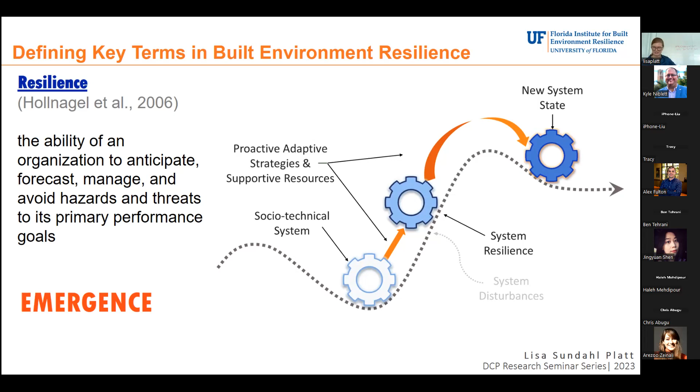So when we look at constructing computational models, in addition to the design basis, which are those characteristics that we're either designing or building for, we look at outside design basis and human basis factors. Outside design basis would be those influential factors that are not within the scope of the building owner's requirements or the building standards, and they're often caused by unforeseen or emergent events.

In Florida, we have seen certainly changes to building code requirements due to increasing hazardous weather events. That's something that my license is coming due for renewal, and I have to take a bunch of CEUs on increased wind resistant codes. So those are outside design basis factors, because we know although hurricanes are going to hit, we don't know the extreme results that they're going to cause.

So those are outside design basis. Human basis are basically those results that occur due to individual human behavior. We know it can be very difficult to predict how humans are going to respond in a given setting when all things are normal. Certainly when things are not normal, humans have a tendency to behave in ways that can be very diverse. So part of designing for resilience is understanding the variability of human response in a given environment.

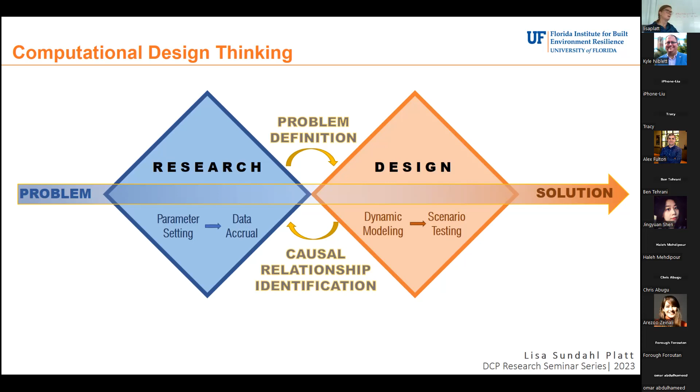Now it's increasingly useful to use computational models to better predict the inferences you have about the outcomes of your design or construction. In terms of design programming, we can take a design programming hierarchy and look at...

...the integration of AI through gathering relevant information - in other words, what's the causal relationship between inside and outside design basis factors, quantifying the requirements, how does the current system architecture influence dynamic performance outcomes, and then summarizing the problem: what do dynamic scenario simulations tell us about predictive design resilience potential?

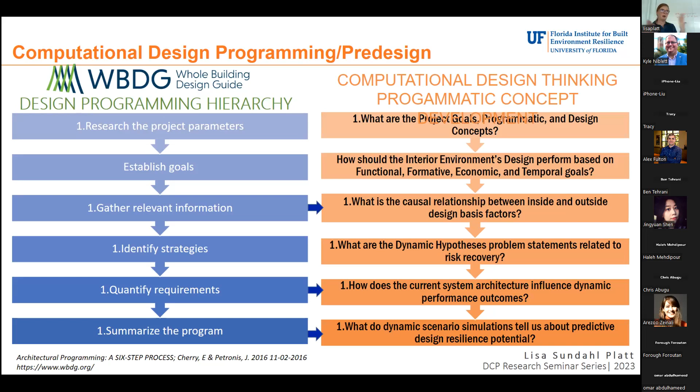So we can see something that we've used for decades now, the whole building design programming hierarchy, marries up well with this notion of applied computational design modeling.

So where do we usually start when it comes to curriculum development? Usually when we're training students - and we have a lot of introductory courses in this college right now - we look at teaching student principles of machine learning. Machine learning is a good on-ramp method for having students be familiar with ways to use applied AI to inform design.

Predictive outcome analysis - the goal being to train a model so that it can predict outputs when given new data, and then understanding the data relationships. Supervised learning offers a way to use machine learning to evaluate relationships between input and output variables.

Achieving this can be a very tall order. There are two main techniques available to designers to test design. One is usability testing, which is very effective for generating feedback loops on design performance. However, it's expensive and time consuming because you have to outreach to users and get their opinion, and that can be misleading if you're talking to the wrong people.

Another approach is modeling, which requires abstracting human performance characteristics to determine systems interaction outcomes, allows for scenario testing to predict what design versions result in the best performance, and is a multifaceted approach to making predictions about users.

One of the quotes I always use when I teach the data science for interior environments class is: all models are wrong, but some are useful. If you look at a map of the world, it's not actually an accurate map because it's a map — it's not the size of the entire planet, or it'd be completely accurate. So in understanding this, we can use modeling as a form of abstraction to better understand the general outcomes of the predicted system users.

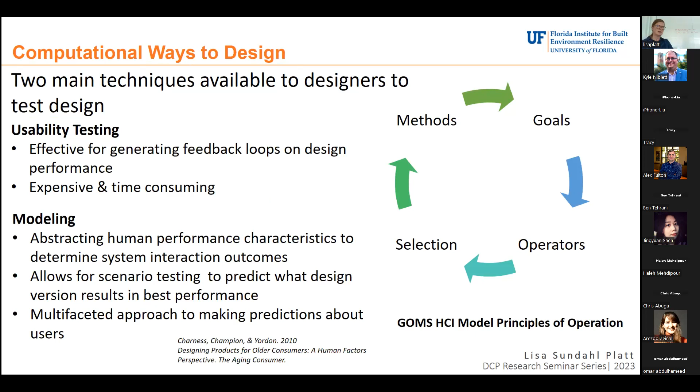One approach we use in our research is agent-based modeling, which also offers a nice on-ramp to systems dynamic modeling. Agent-based modeling looks at developing computational models of discrete agents within an environment with differing components, to see what their self-organizing behavior is. The benefit is that if you have a system where you're trying to ensure it achieves certain areas of goal-seeking behavior, this gives you a good idea of whether that's happening or not.

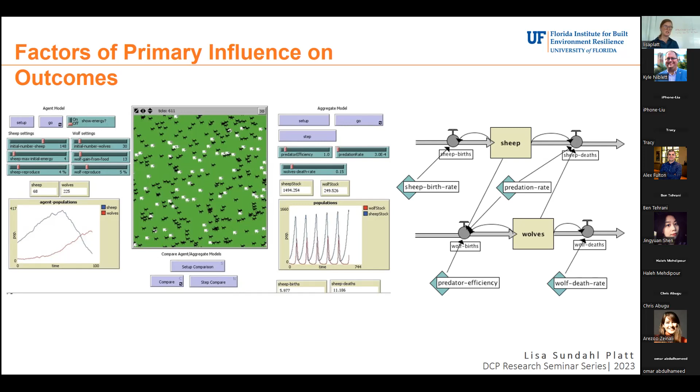The example I have pulled up here is called the wolf-sheep predation model. It looks at the resource of grass, the resource of sheep feeding the wolves, and wolves' predation on the sheep, to see what the overall system behavior is. I like to use this as an example for explaining how this is valuable to building, because the grass in and of itself is a resource much the way built infrastructure would be. We can see what happens with resource provision and availability being balanced, versus that changing with some slight alterations to the model.

I have a video that shows this running — it takes a little while to start. We can see as the model runs, wolves eat the sheep, sheep eat the grass, and over here in terms of population, we have cycles up and down, but the system dynamics are relatively balanced.

And that's what we like to typically see when we have a system. It's very rare when we have everything be a completely straight line. That's not usually feasible. However, when you change the variable of resource provision in terms of just changing the grass.

So if I increase the time it takes for the grass to grow, and if I also decrease the benefit of that resource to the sheep, we can see what that does to the overall system. So I'll go ahead and set that up and then press go.

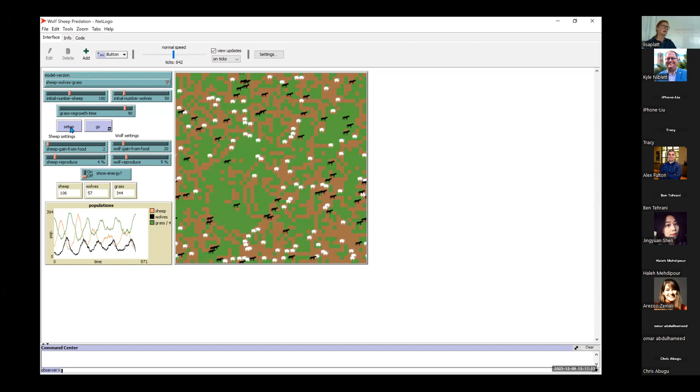And so as time goes on, we can see automatically what happens to the wolf population. It completely dies out. Wolves don't eat grass, so that's kind of a surprise, right? But if the net gain to sheep is diminished and sheep are the primary resource for wolf well-being, then the wolves die out.

And then we can see again over time the sheep are kind of hanging on, and then eventually everything dies. So the benefit of understanding this model is when we're looking at resource provision in terms of availability and utility, if we change the accessibility and the utility of that resource, the entire system can suffer in ways that we didn't necessarily predict.

So part of this is looking at the dynamics of the system, and dynamics of the system goes back to that box that I showed in the corner of looking at the whole systems. It's that Bertalanffy's general system theory idea of a holistic approach to systems.

So one of the ways that I explain this is the bathtub model. As we have a flow of resources into a repository, how do increases to that or decrements to that change the overall performance level?

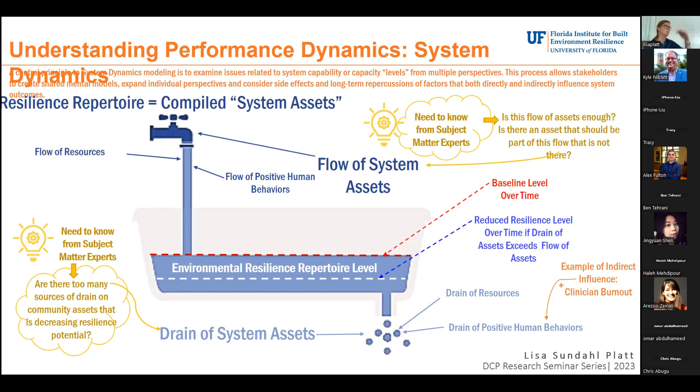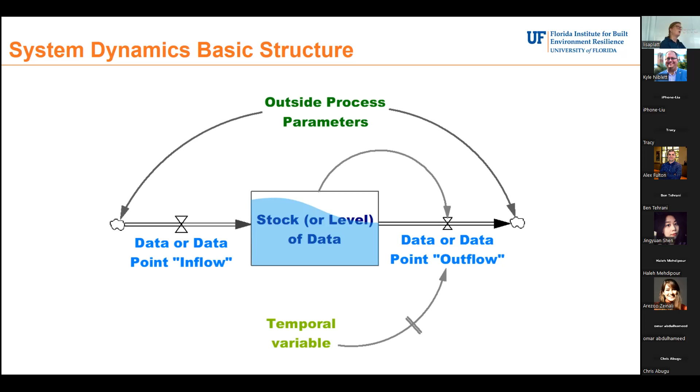And so this is basically the structure of a systems dynamic model. We have data flowing into a specific stock, and then we have data flowing out of that stock. And the outside process parameters are what are often either feeding into the system or outside the system. And then there are also temporal variables introduced into this that show, okay, over time, this is what we can expect with our system performance.

So if we look at the discrete relationships between factors of these, we have stock factors and a goal-seeking behavior. And then we also have variables that are related to this.

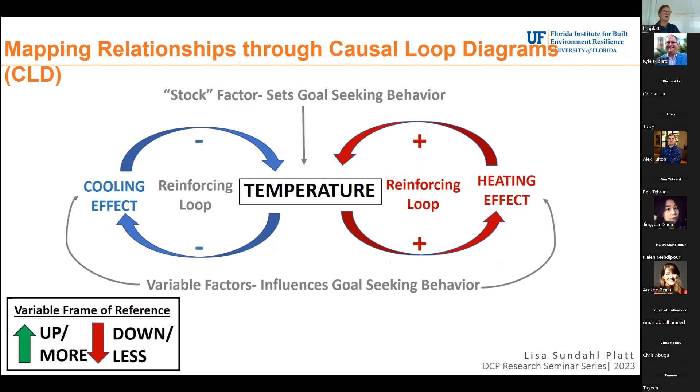So if we take something like temperature, we know that as cooling effects increase, the temperature goes down. As the temperature increases, the cooling effects go down. That is a balancing loop, or reinforcing loop, that's negative.

As heating effect increases, temperature increases. And then as heating effect decreases, as temperature increases, heating effect increases. That's a reinforcing loop that's positive.

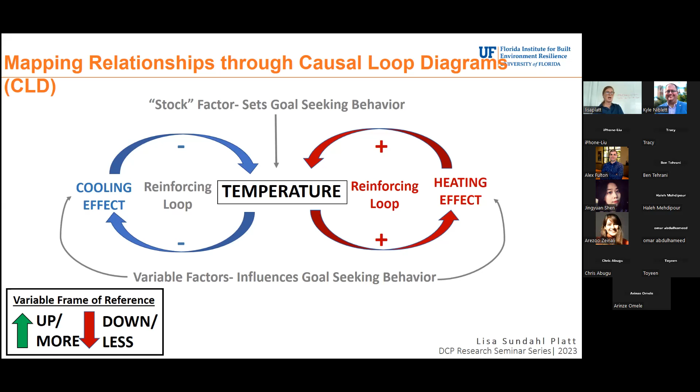So these variable factors influence goal-seeking behavior up and down. Those are things that if we look at an actual built environment, we can introduce designed interventions that can influence this. So an inside design basis factor would be to include a variable that has a cooling power source.

So a cooling effect for temperature: as cooling goes up, temperature goes down, and as temperature goes up, cooling goes down. That's reinforcing. And then heating effect would be the same thing, but reinforcing positive on both sides. These, again, are internal system design basis variables and generally the things that we can control.

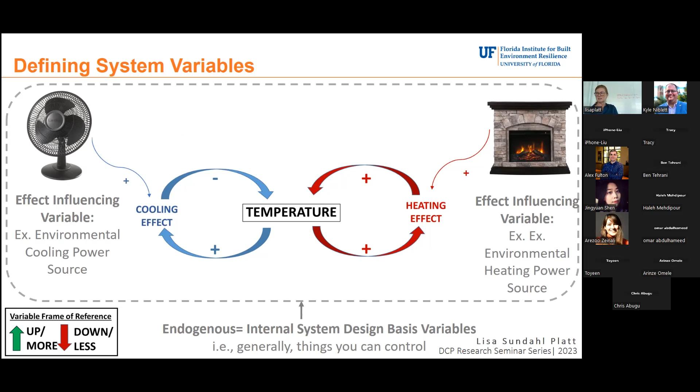However, again, as we were talking, buildings exist in relatively complex environments. So part of being successful at design and constructing a building is understanding those exogenous, or external, system design basis variables. In other words, things you cannot control as well.

So in terms of heating, we also need to look at ambient temperature outside, things like climatic changes or the after effects of things like hurricanes or droughts, or if you're on the West Coast of the United States, fires, and then things like urban heat island effect if you're in a city or a suburb.

And then in cooling, in terms of extreme weathers, the center photo is actually - I'm originally from Buffalo, New York, and this is a recent picture of Buffalo during their most extreme winter storm. So things like unexpected climatic events that cause the temperature to be very cold, the degree of shading that you might have in an environment, and then obviously precipitation that can cause cooling effects.

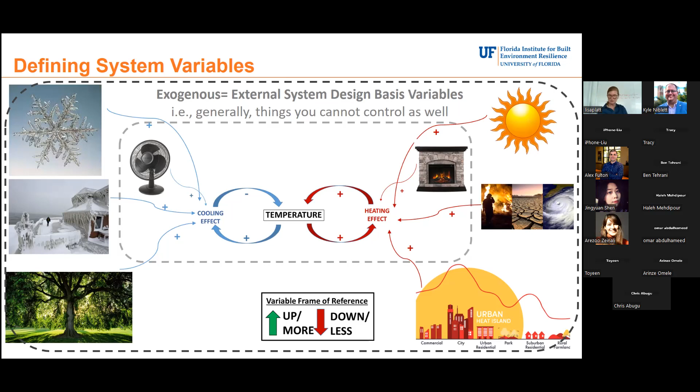We know something about this. We can design for this based on the region that we're designing for, but it can be very difficult to predict the extreme natures or the extreme ends of this.

However, it's very difficult to predict how this will happen. And so therein lies the benefit of using distributed AI, combination of AI models and agent-based modeling, to better predict how this might happen.

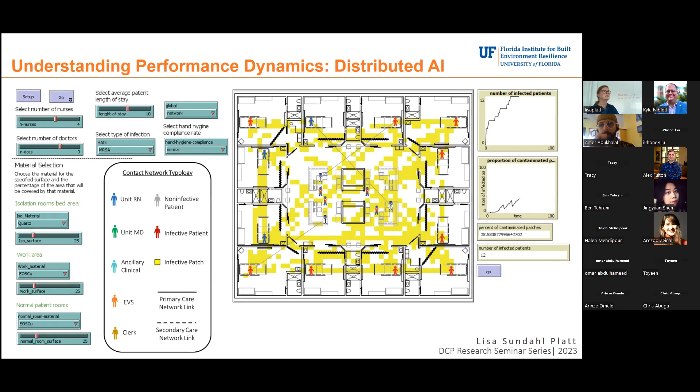To see how pathogens are transmitted throughout this environment. Again, this is a very simplified hypothetical environment, but it gives us a much better idea that the spread of infection is not something we need to specifically look at just for patient rooms or treatment rooms, but it exists quite a bit around the clinical workstations as well.

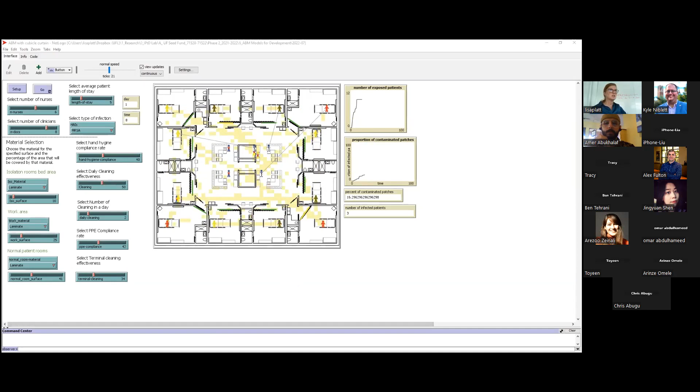We can also see there's a difference when we look at MRSA, a different type of pathogen in terms of its spread and trajectory. For example, the number of exposed patients increases at a greater rate with the data we had on MRSA than with C. diff. This is specifically constraining to high touch surfaces comprised of things like laminate, but it gives us a better idea about the spread of pathogens in ways that static discrete level predictive models wouldn't be able to.

This is an example of systems dynamics using the same type of framework, looking at susceptible, infectious, and staff removed from infectivity population from a more whole systems approach, looking at just surface infectivity. We can run a simulation on this to change a certain percent of potential surface infectivity and see how it impacts infectious staff population over time.

This is an 8-hour shift that allows us to see to what degree staff become infectious when we change the degree of infectivity of a surface material. We can also change the surface infectivity reduction intervention and see what that does to automatically removing staff from infectivity risk.

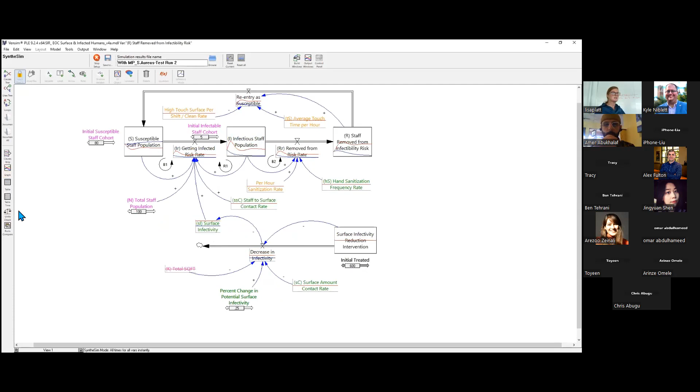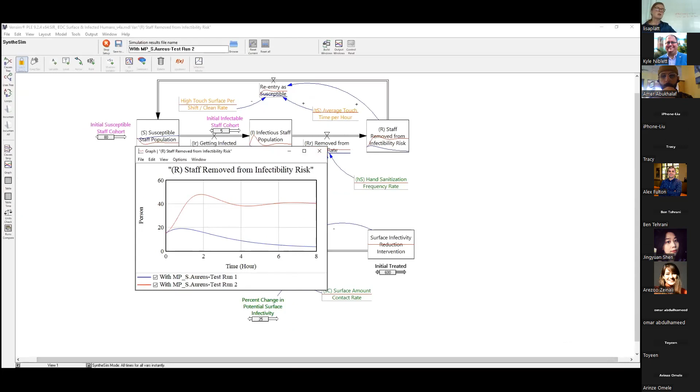The benefit of this is it allows us to look at a very complex system, honing in on certain interventions and their integral effect on system outcomes in a way that discrete modeling wouldn't allow us to do. Heuristics or best practices also wouldn't necessarily allow us to forecast the outcomes of this.

So in terms of the benefit of using computational design thinking, the research snapshot of what we're working on right now is we're leveraging advanced technologies to forecast the effects of environment design interventions on system outcomes through computational scenario simulation, to contribute a deeper understanding of risk priorities in human-centered design for environments.

This is to enable planning teams to proactively address environmentally based challenges that impede adaptive response to safety-related demands before design implementation. The applications for this are things like risk prevention and prediction.

What if planning scenario models? So what will happen if this hurricane hits? What will happen if this pandemic or epidemic hits? And then design resilience forecasting.

We're even using this for things like aging in place right now. What is the goodness of fit of a specific type of supportive housing design or a specific type of long-term care design for people aging in place, or for accident reduction in older populations.

So it's generalizable across a number of different types of applications. We're doing ongoing development for socio-ecological systems analysis for pre-design, which is something a colleague is working on, along with algorithms for system risk and design resilience inference, and collaborative design dynamics modeling for decision support.

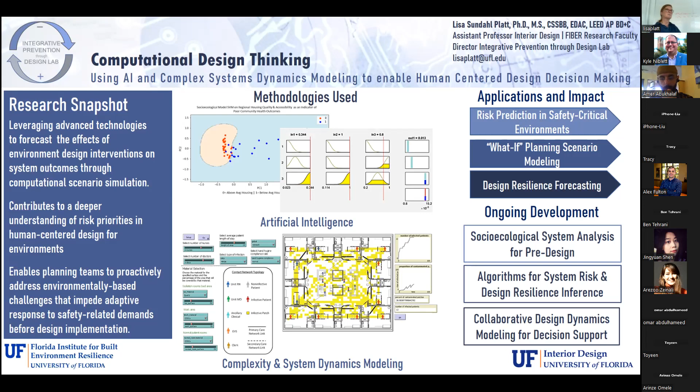So again, using this as a tool in the toolbox for people in construction, design, and planning to help inform your own area of domain expertise in planning, design, or construction.